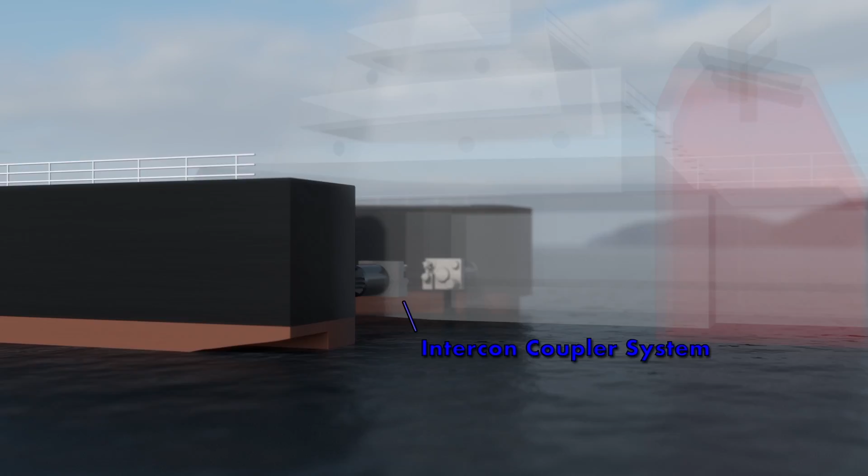Crowley Petroleum Services has a variety of articulated tug and barges, which rely on the Intercon coupler system to mechanically connect the tug and barge. Once the units are joined together with the Intercon system, it allows the ATB to function as a single unit.

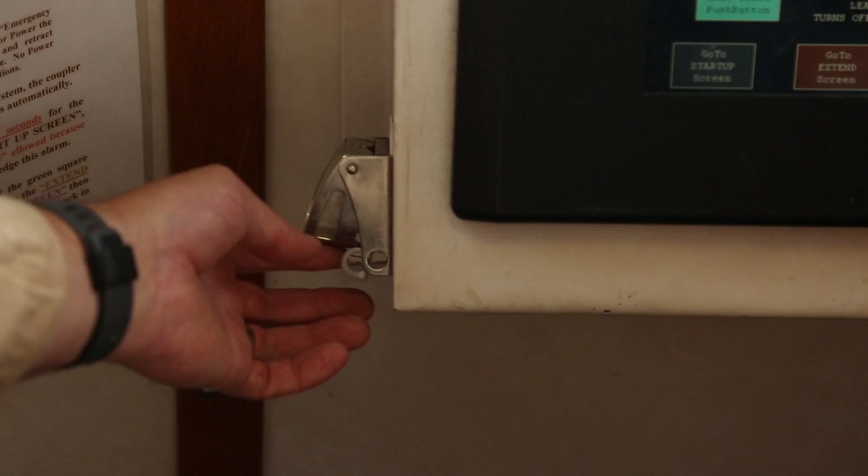The system primarily has automatic functions, though some aspects of the Intercon coupler do require manual operation and possibly the use of the manual override button.

This training is to familiarize you with the Intercon coupler system. With hands-on training and your captain's authorization, you should be competent in performing basic Intercon operations and responding to alarms. You will be required to complete an onboard familiarization and assessment of basic Intercon operation skills and understanding, including physically operating the manual override switch, or MORS, before you can assume a navigation watch.

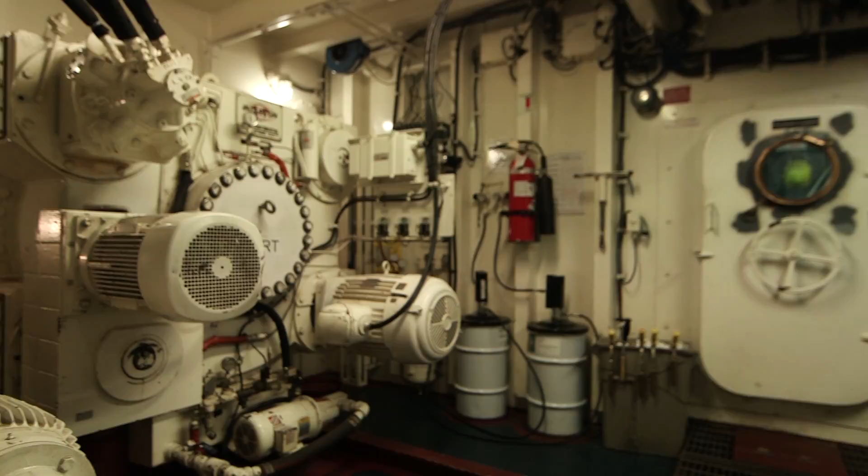In the Intercon room, there are a number of different components you need to be aware of. High-speed motor, low-speed motor, hydraulic motor, hydraulic power unit, hydraulic control paddles, Trabon system controls,

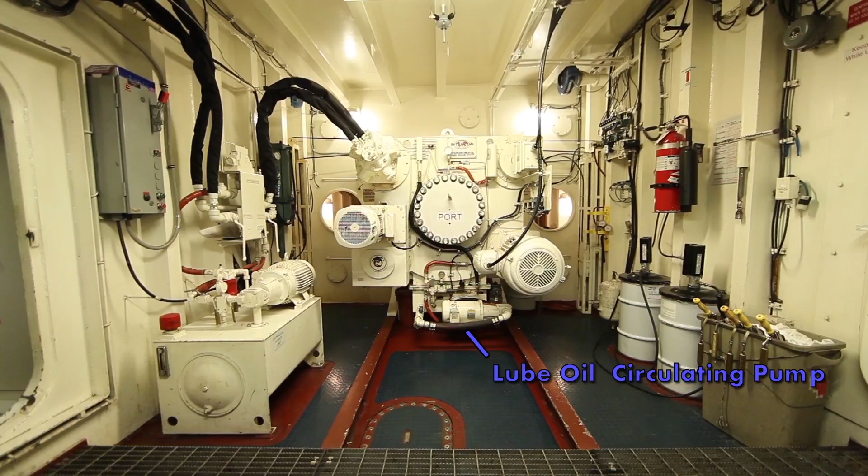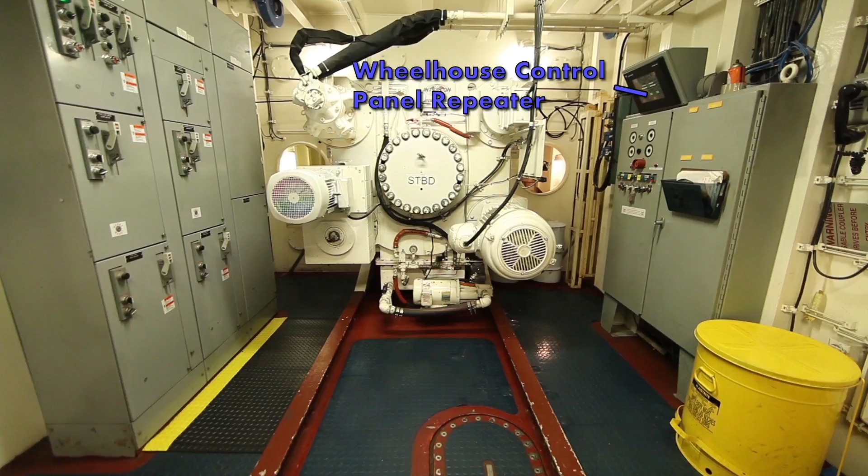lube oil circulating pump, load cell analog pressure gauge, local control panel, wheelhouse control panel repeater, air control panel. Each ATB has an Intercon room with port and starboard couplers, which are operated with high or

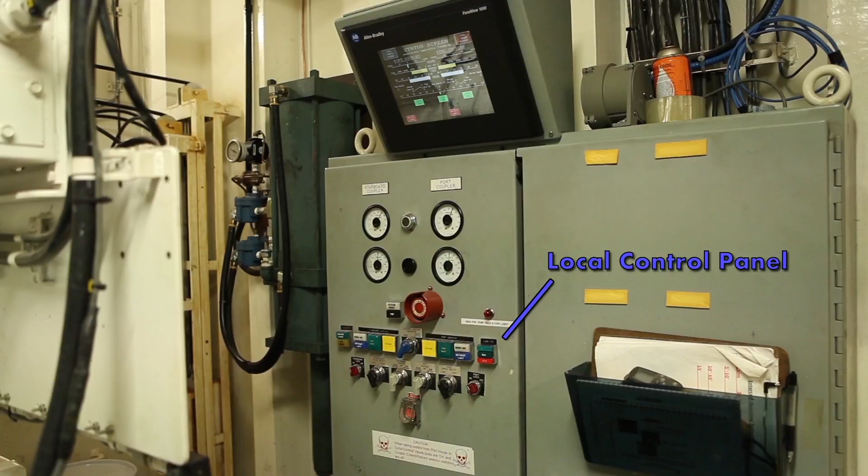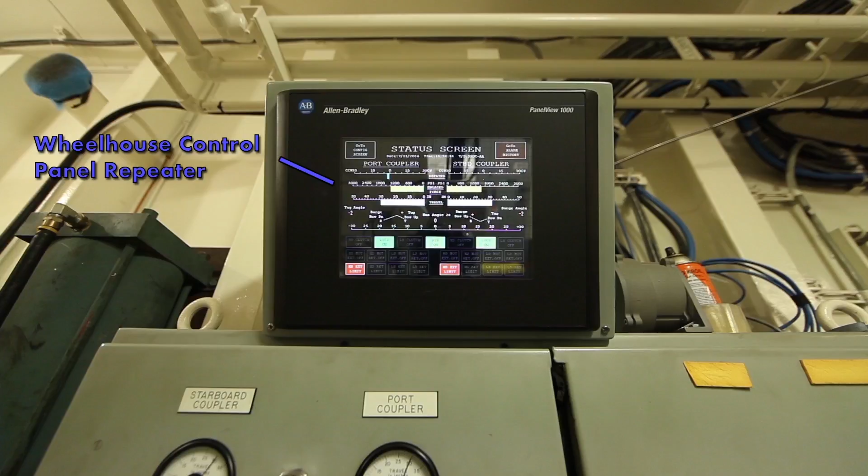low-speed electric motors or a hydraulic power unit, HPU. There is a local control panel which allows manual electrical operation of the couplers. Above the control panel is a video screen, which is a wheelhouse control panel repeater and cannot be used to operate the system. There are separate manual controls for operating the system hydraulically and for manual operation of the Trabon pin greasing system.

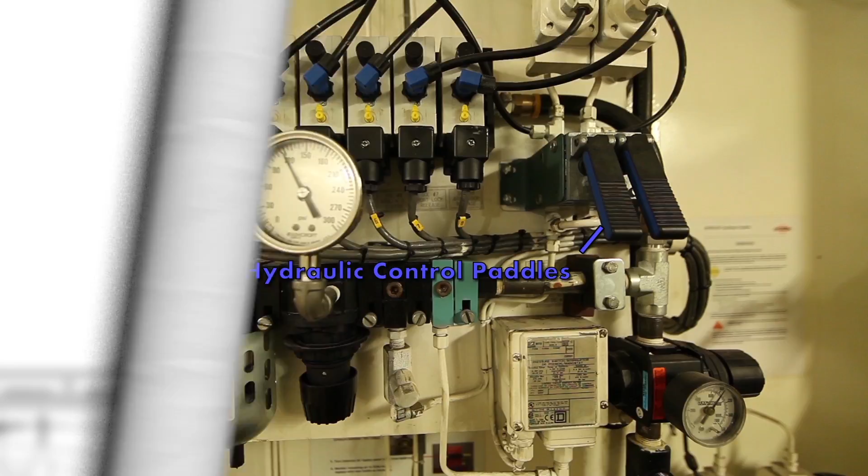Upon joining the vessel, your captain will brief you on the Intercon coupler system, as well as outline the Crowley Petroleum Services Intercon standing orders, including what alarms to watch for, when and how to use the manual override button, and what Intercon information to log. The CPS Intercon standing orders are the baseline. The captain may have additional standing orders.

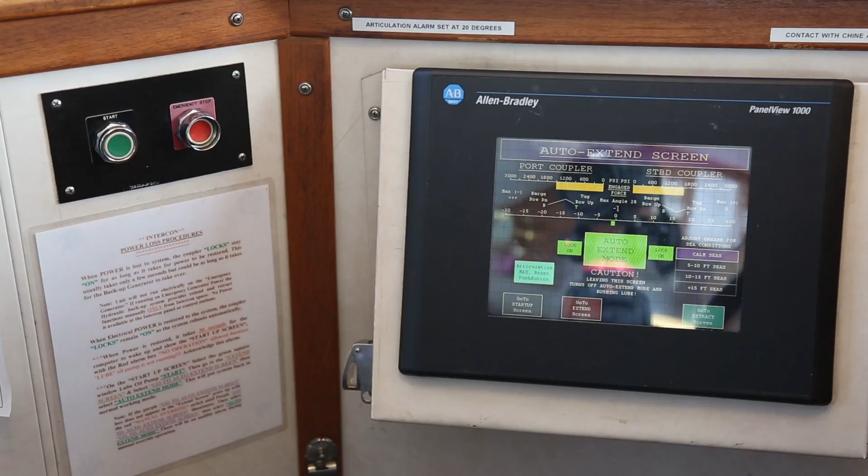Each wheelhouse is equipped with port and starboard Intercon control touchscreens. Next to the control screens are a start button, emergency stop button, and a manual override button. While on watch in the wheelhouse, whether underway or at anchor, the Intercon coupler system will normally be in the auto extend mode. When the Intercon system is in the auto extend mode, the locks are on and the engaged force pressure bar fluctuates as the boat rolls and pitches.

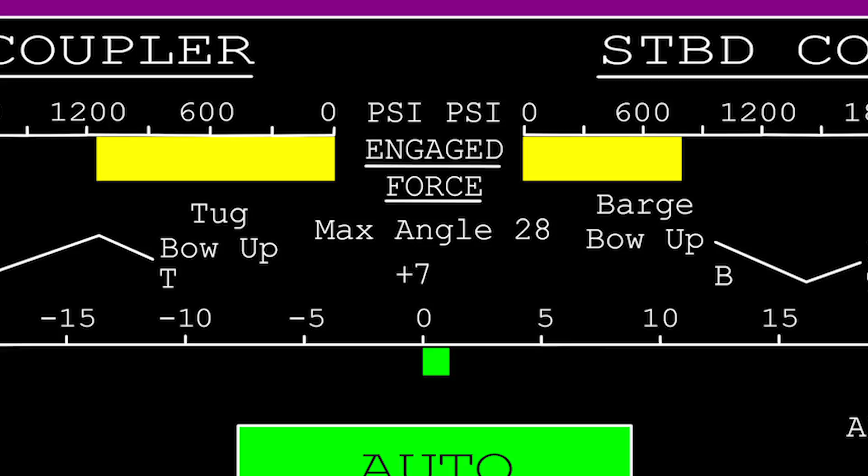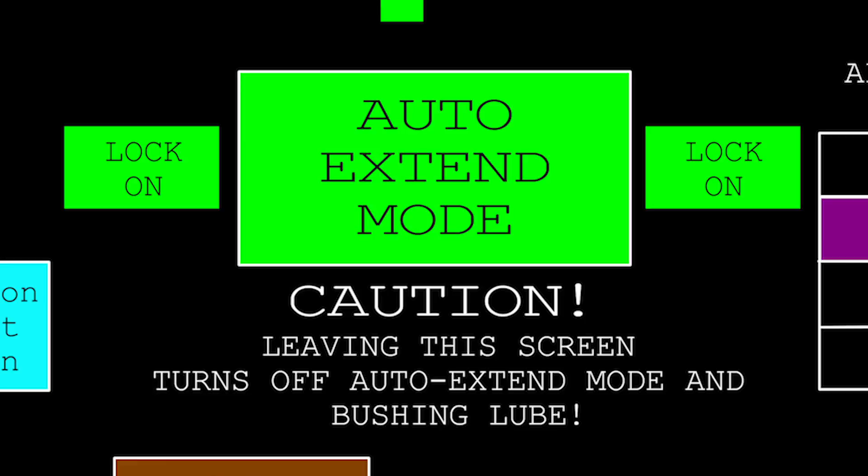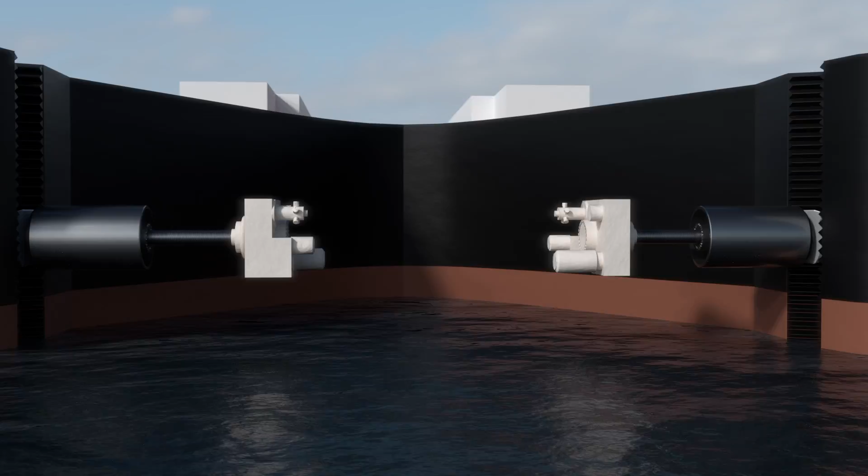This is normal. There is also an articulation indicator which shows how much the vessel is pitching in the notch, and lock status indicators which show if the port or starboard locks are on or off. In auto extend mode, the locks are on and the system will monitor the engaged force pressure on the pins. When certain parameters of engagement pressure have been met, the system will engage the clutch of the port or starboard Intercon unit, disengage the lock, start the low-speed motor, and extend the pin until the proper engaged force pressure is reached. The lock is then engaged, motor stopped, and clutch disengaged.

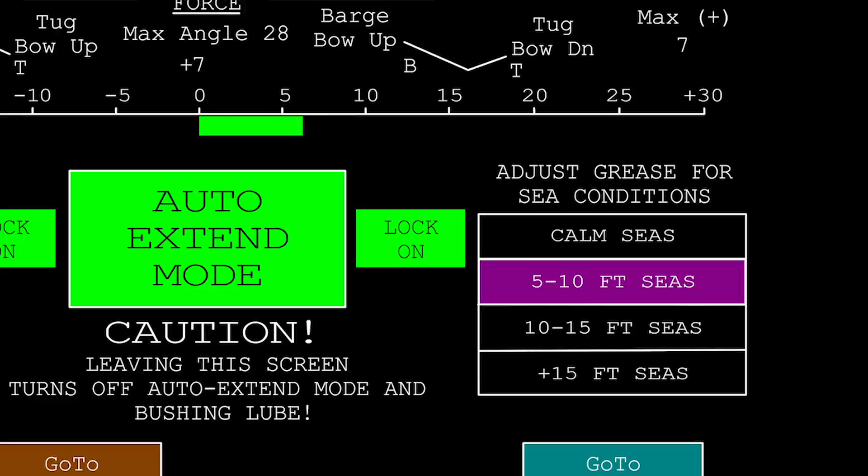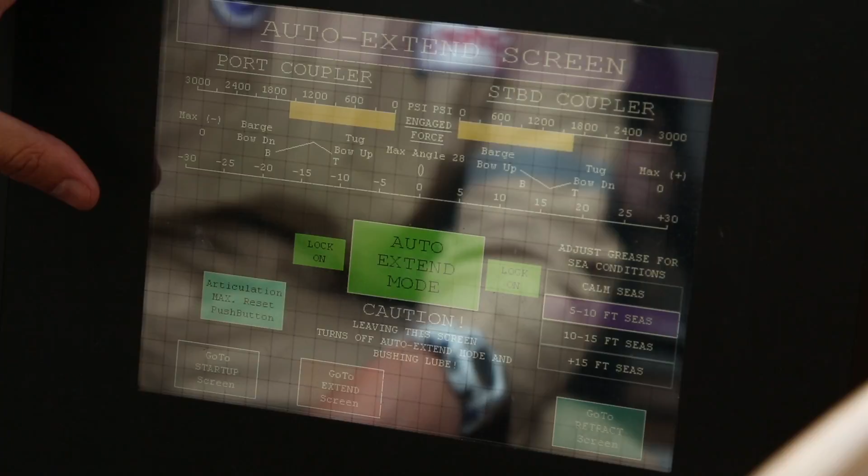Another component of the Intercon system is the Trabon system, which is responsible for greasing the pin bushings and drive shafts. When in auto extend mode, you must select the frequency for the Trabon system to grease the pins. This is done by pushing the box on the auto extend screen, which matches the sea state. When on watch in the wheelhouse, it is your responsibility to monitor the greasing frequency based on sea state in regards to the Trabon system.

In changing weather, monitor the grease setting and adjust accordingly. For example, if you're on watch and the Trabon system, or grease, is on the calm setting and the seas increase, change the grease setting accordingly. You should see the auto extend system pressure up periodically. The frequency of auto extension is based on sea state and vessel conditions.

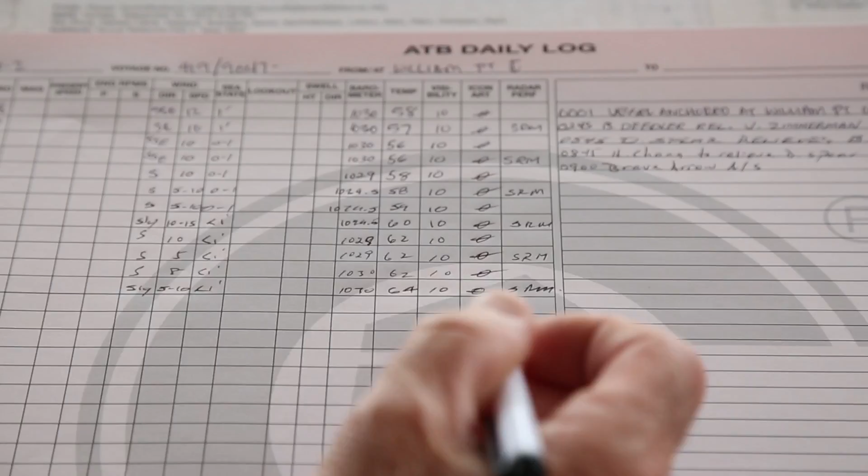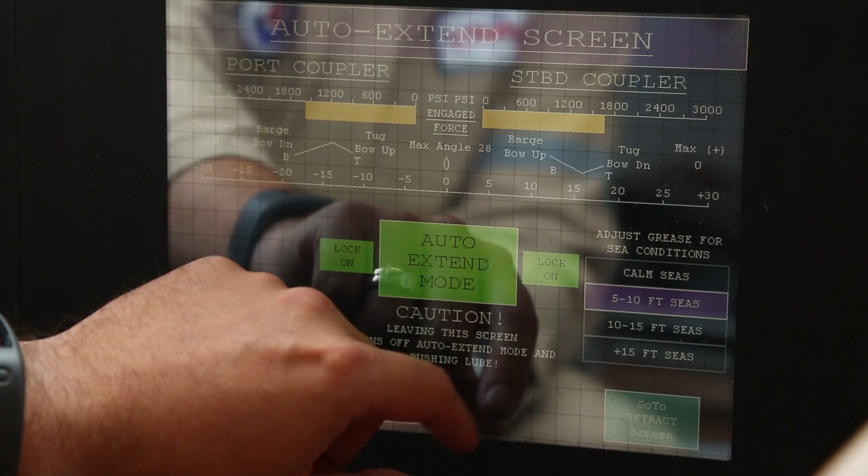Enter the maximum amount of articulation you experienced since the last entry in the deck smooth log, and then reset the articulation indicator. Always ensure you have the Trabon greasing system set to the proper sea state. It is good to err on the high side with grease. In heavy weather, an alarm may sound as a warning that you could over-articulate. Remember, when in doubt, call the captain.

Always visually check audible alarms. Do not assume it is just an auto extend alarm, and act accordingly per CPS Intercon standing orders. Never turn off the Intercon system while pinned up, whether underway, at anchor, or moored. Turning off the system shuts down the lube oil circulating pump as well as the Trabon system.

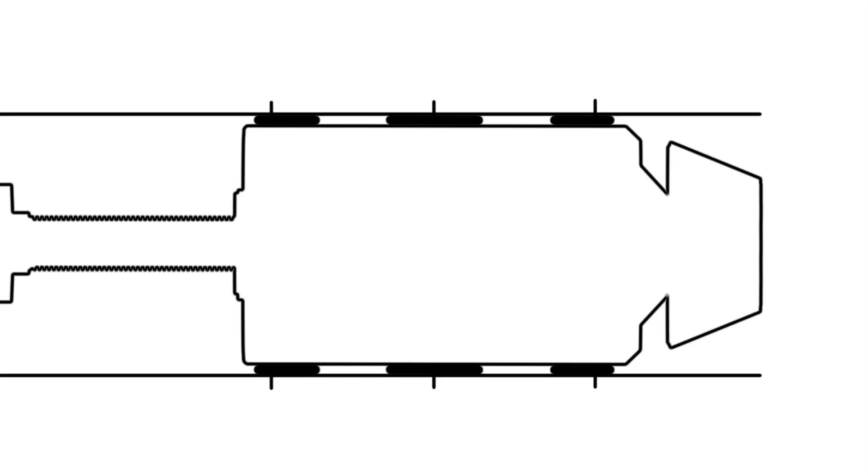Remember, the gear train as well as the thrust bearings are under great pressure and require lubrication whether articulating or not. Intercon advises that turning off the system while pinned up can lead to serious damage.

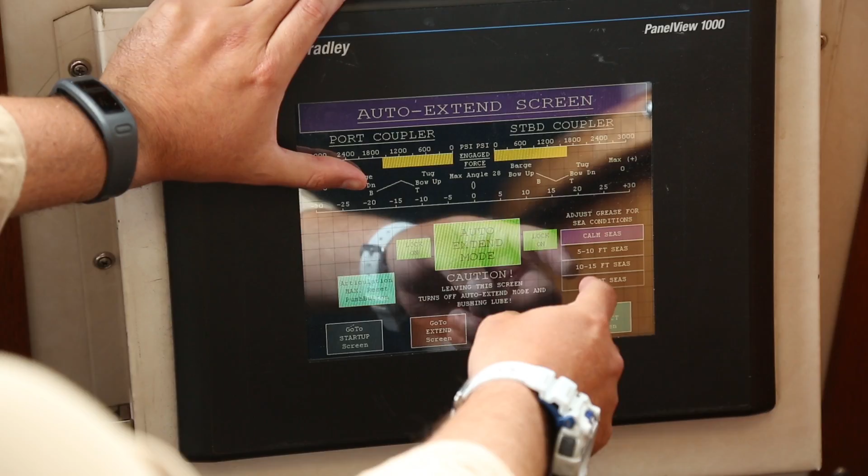When operating the touchscreen, keep in mind the screen will not be responsive if you touch the screen in more than one spot at a time. Additionally, do not place any items other than the plexiglass cover on the screen, as it obstructs your visibility or can inadvertently activate or damage the sensitive screen.

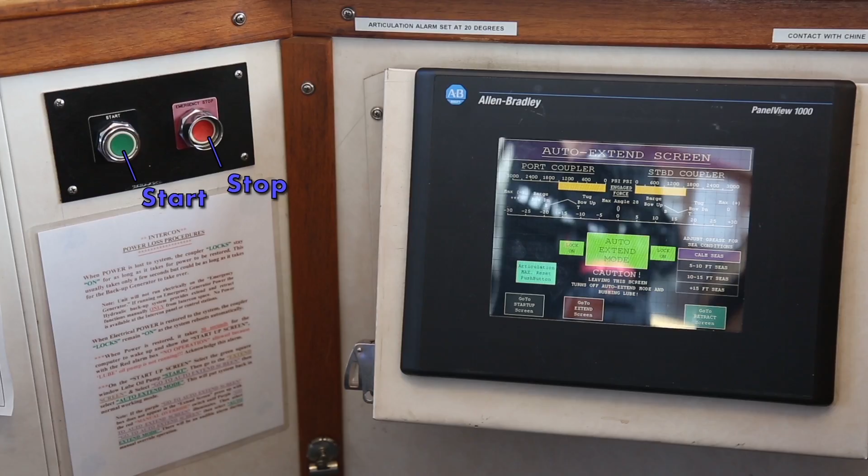There is an emergency stop button next to each Intercon control panel in the wheelhouse, and one on the local control panel in the Intercon room. It will shut down the electrical power to the Intercon system as well as the control system. This button should never be used without the captain's consent.

The Intercon coupler system has a variety of audible and visible alarms. Call the captain and engineer for any alarm other than the alarm for normal auto extend operation. The Intercon display should be visually checked frequently, at least every 30 minutes, and more frequently when rough weather or other conditions dictate. For all alarms on the Intercon system, read the alarm and act per CPS Intercon standing orders.

In the event you get an alarm that you've never seen before, are unsure of what the alarm is, or you find the Intercon screen is no longer on the auto extend screen, call the captain and engineer and prepare to use Morse if necessary. It is good practice to read each alarm before acknowledging them, since the alarm banner disappears when you acknowledge or silence it. Do not get too caught up analyzing alarms. Your job is to be prepared to act to maintain connection integrity.

The alarm history function will allow the captain and engineer to see alarms which have been acknowledged. If the Intercon control panel has changed to the startup screen, lost functionality, or gone blank, it is a serious situation. Call the captain and engineer and follow the Intercon standing orders.

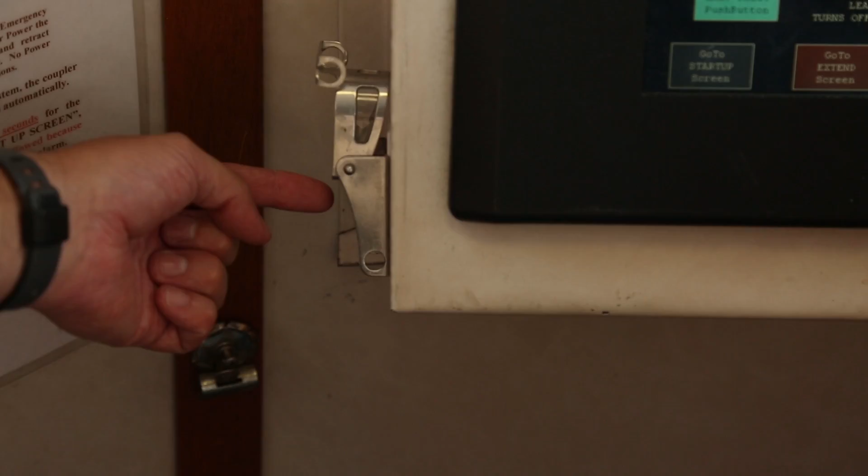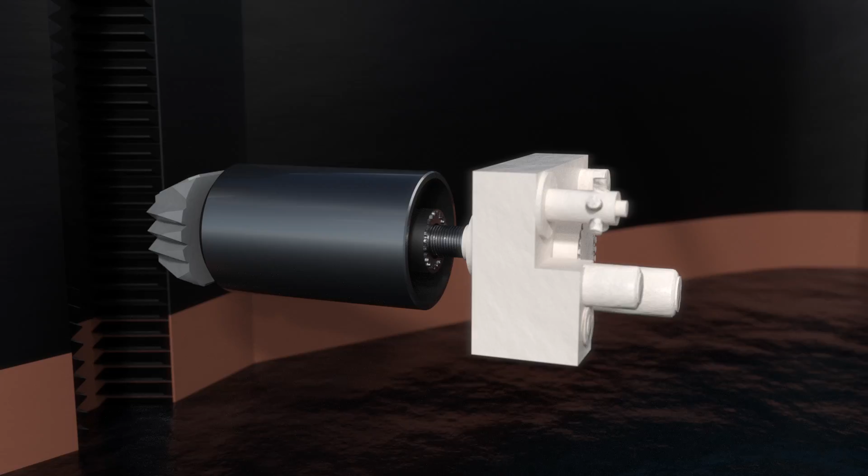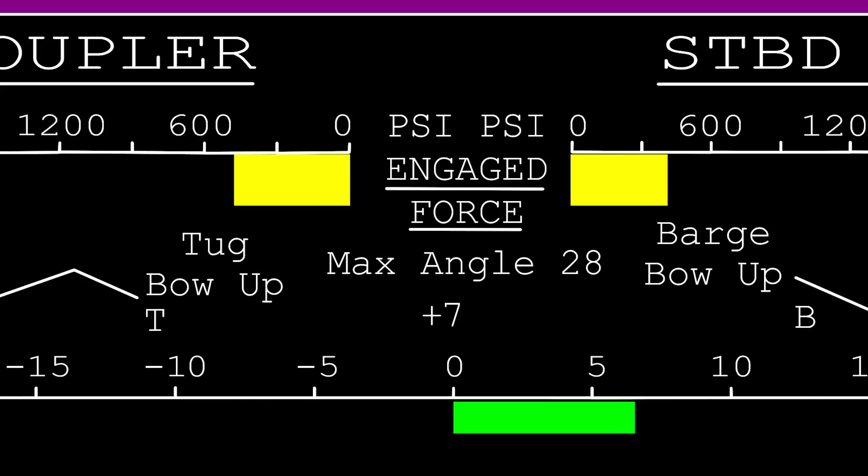The Morse button overrides the normal safety limit switches, engages both port and starboard clutches while simultaneously releasing the locks, then energizes both the port and starboard low-speed motors and presses both pins out simultaneously until the Morse button is released. The Morse button should be used if you feel the boat banging in the notch or if the engaged force pressure drops below 600 psi for an extended period of time with no auto extension.

Examples of alarms which indicate the tug is in danger of coming out of the notch and that you may need to use the Morse can be found in Annex 1. An alarm for lock low pressure is an example of an alarm requiring immediate action. Loss of lock pressure should result in an audible alarm, a red alarm banner, a change from green to red of the affected lock indicator, and most likely a drop in engaged force pressure.

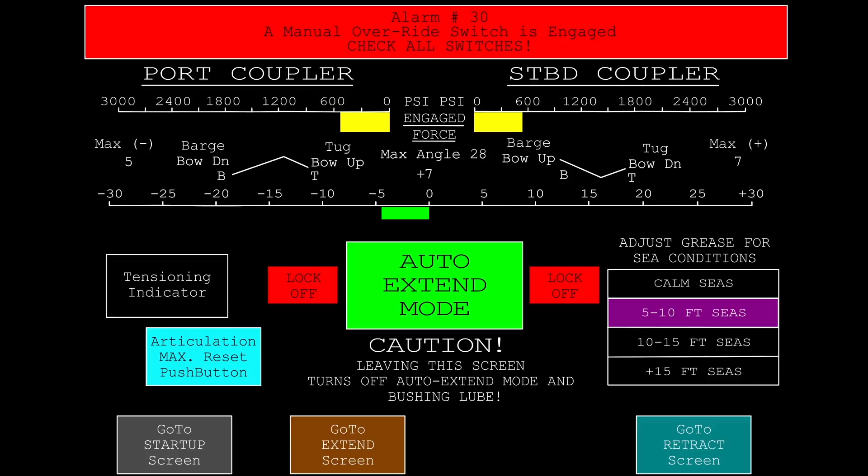To operate the Morse, first lift the guard cover. Push the button in and be ready to get both an audible alarm and a red alarm banner stating you are about to energize the Morse. Continue to hold the button in until the engaged force pressure is above 600 psi. If no engaged force pressure is indicated, hold the button until the boat stops banging in the notch. You may need to hold the button for an extended period of time.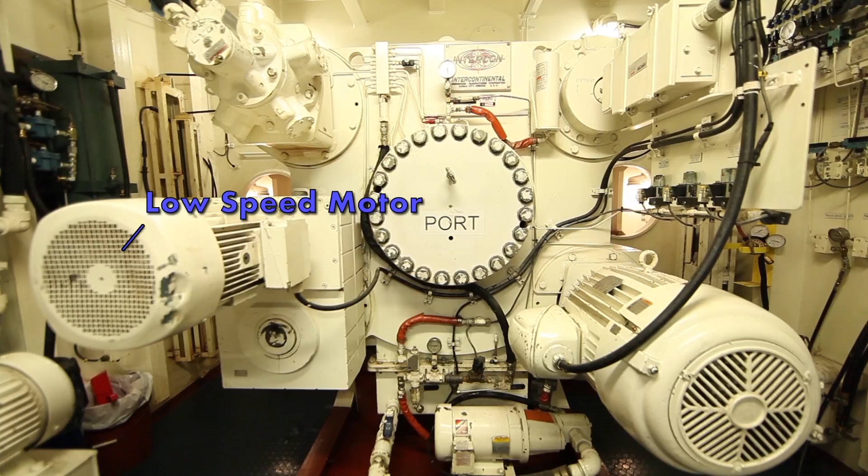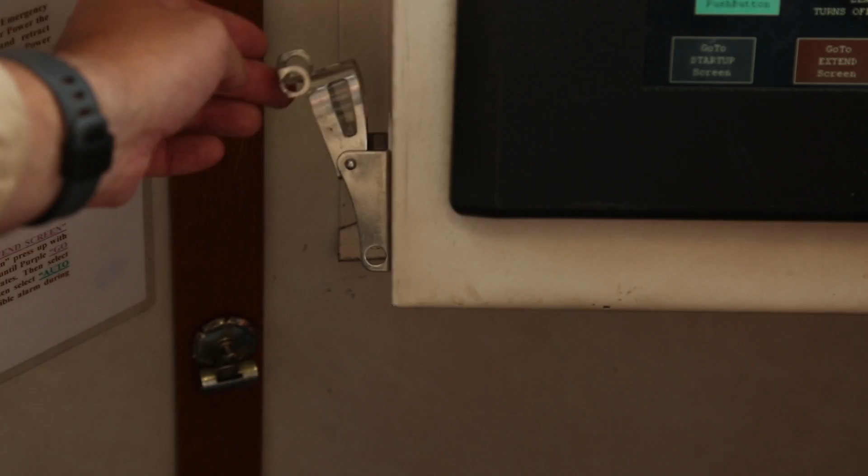However, if you hold the Morse button indefinitely after engaged force pressure is adequate, you will overheat one or both low-speed motors, which will render them inoperable for a significant period of time, which may result in coming out of the notch. When you release the Morse button, the screen will return to the auto extend mode. Use the Morse button when necessary. Always call your captain and engineer after use. Anyone with hands-on training and who is authorized by the captain may use the Morse button.

Remember, the Intercon coupler system provides a secure tug-barge connection provided certain conditions are met. These include a properly trained and supported crew, routine maintenance, and most importantly, watchstanders who respond in accordance with their training to alarms and situations which threaten the tug-barge connection.